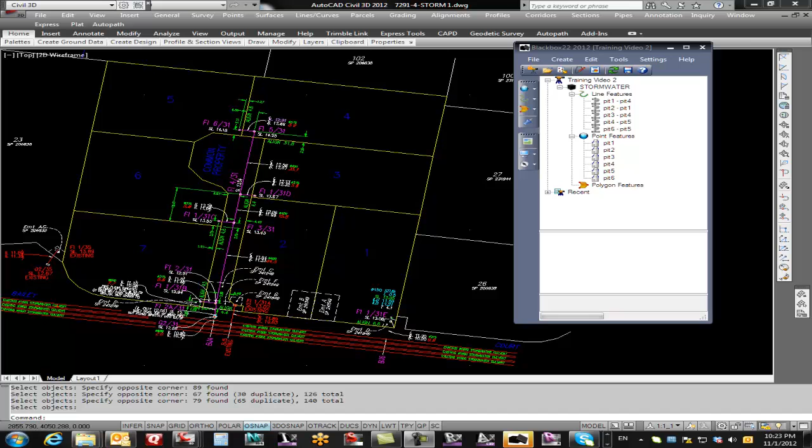In this video we're going to be capturing text data from the AutoCAD drawing and pass it back into our database. In the previous video I mapped in some layers and created the assets, but these assets came in with the name of pit 1, 2, 3, 4. But if I look in the drawing, they're actually 6/31, 5/31. The pipes don't have any grades on them, invert elevations, because it's a 2D drawing. Now if this was in 3D when I did the mapping, it would have actually mapped this information.

So what I want to do is capture the text data and have it populate. If I come in here, I can go into my capture settings. I'm talking about a stormwater here, and when I'm picking up a point feature, I want it to ask me for the asset name and the elevation or RL. Then when I'm picking up a line feature, I want it to ask me for the upstream first, then the downstream, and then the diameter.

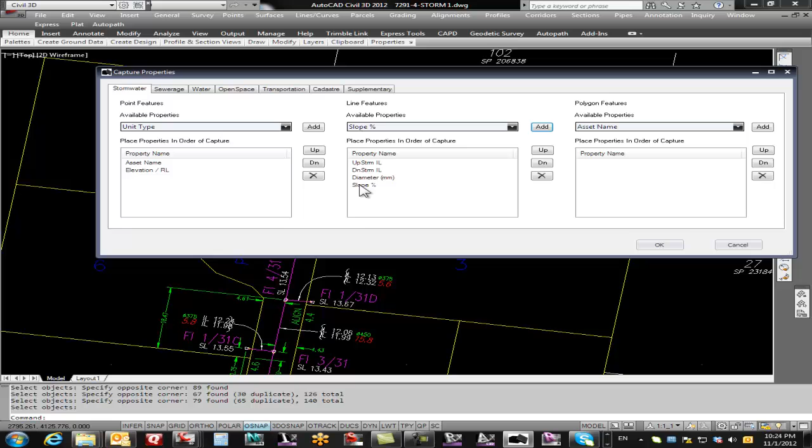A user can come in and pick any asset that they want, and we can add different properties to it. So if I wanted to select the slope, I could add the slope into that. Okay, I don't want the slope in this, so I'm going to go OK.

Now as we can see over here, it says pit 1, 2, 3. So what we're going to do is go into capture properties. I select capture properties, and it goes into the drawing and says select your entity. Okay, well this is my entity I'm selecting. So I pick that, and you can see a circle appears, so it knows that this is what you've selected.

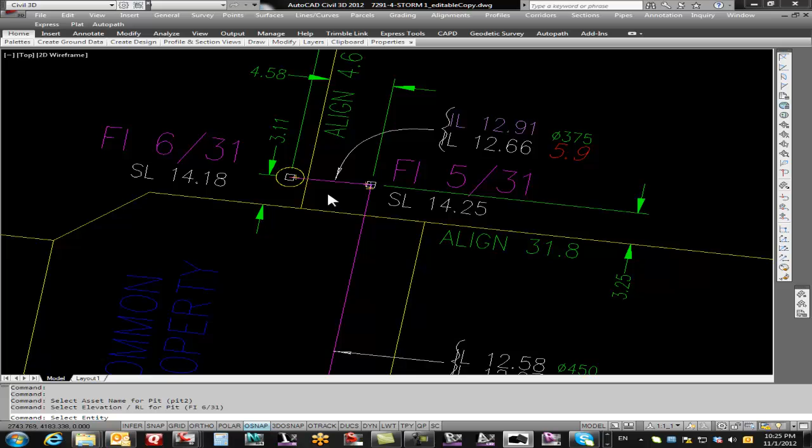Down below it asks me to select my asset name for the pit, so this is the name. Then it asks me for the RL or elevation, so that's the elevation. Then it comes up and says select your next entity, so I'll select this one, and I'll select this for the name, and this for the RL.

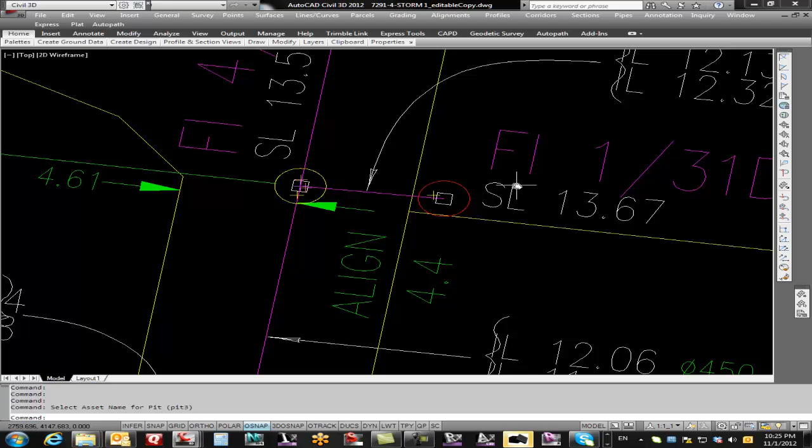I'm going to go ahead and do the structures first, so I'll select this one. There's my name and my RL. Let's go to this one, here's the name and the RL. We've got a couple more to do here. Let's do this one, and there's my name and my RL. And last one, here's my name and my RL.

Now we're going to look at pipes. So I'm going to select on the pipe. It knows that it's got a pipe. So now it says, what's your upstream? There's my upstream, there's my downstream, and there's the size, 375.

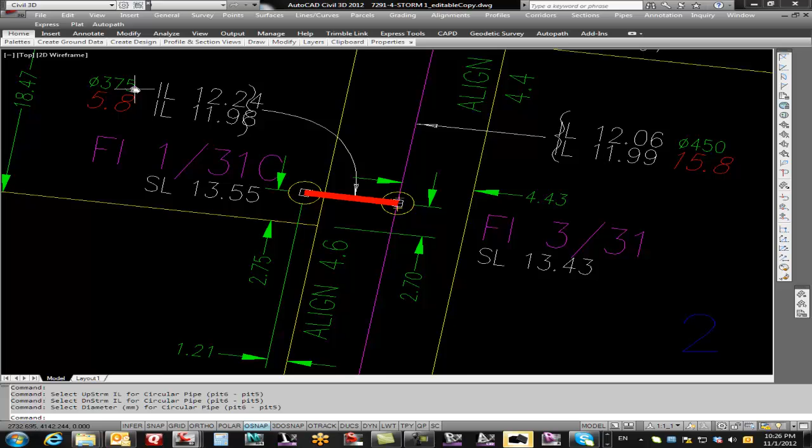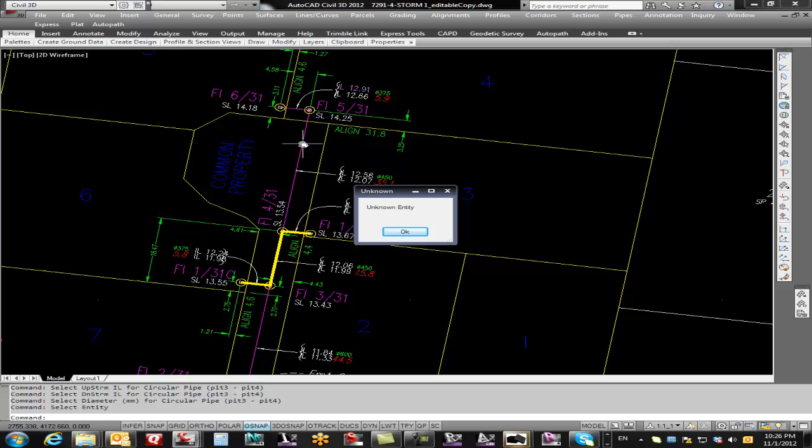Let's go to the next one. So there's my upstream, my downstream, and my size. Let's do this one, there's upstream, downstream, and size. And I'm going to try this one. Oh, it says unknown entity. Okay, so what's actually happening, I'm going to show you.

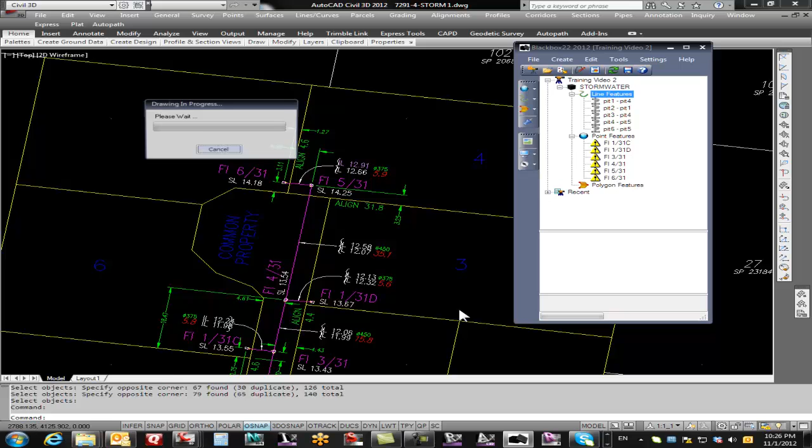What I'm going to do is draw these line features in here. So I need to get out of this command. I'm going to bring in the line features, and I'm going to say draw all these line features. I'm just going to select all, I'm not going to put any text on there. I'll say generate and exit, and I'm going to go OK.

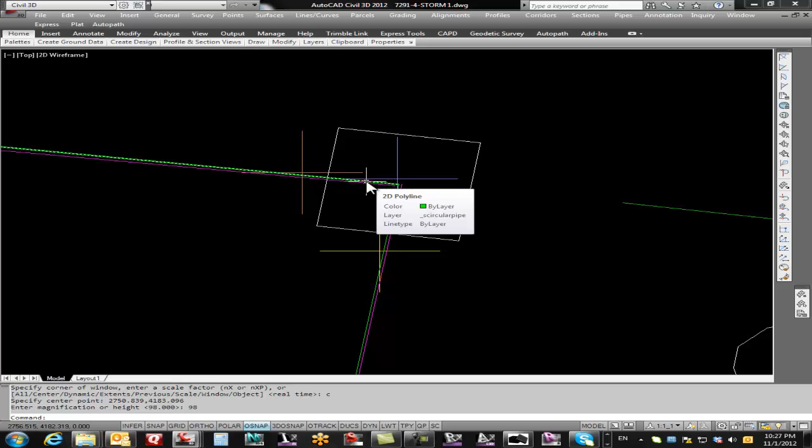Now if I zoom in here, you'll notice that the magenta lines are the lines that were in the drawing. When we're talking about the GIS, we need to have the connectivity. The lines need to go to the center of the structure, so when they're doing the GIS analysis on it, it can actually see that they've got a flow here. There's a tolerance in there, and we looked so far out around the center of the structure to look for the line. So when I was trying to pick on that line, it didn't recognize it because it knows it's actually in this location now.

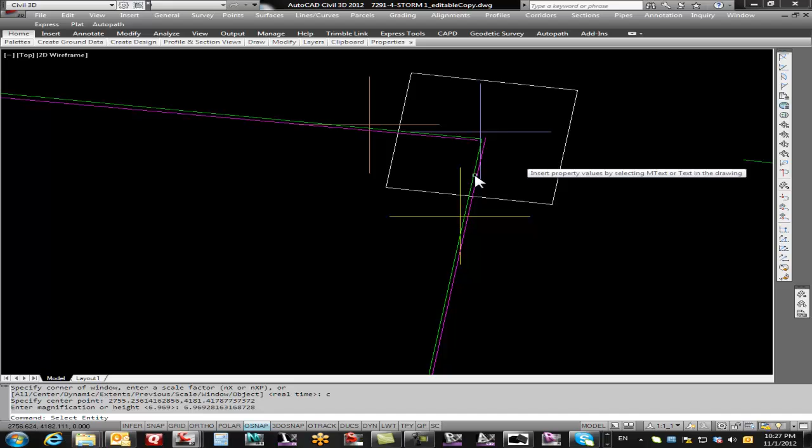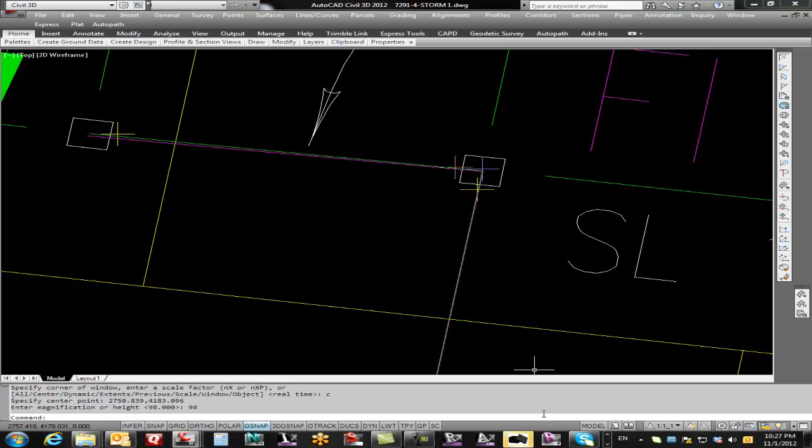So what I'll do here, I can finish this off. I'm going to come back in here and select this line here. There it knows it's bold now. I'll select that. There's my upstream, my downstream, my size. Let's just finish this off. We'll select this one, and say that's my upstream, my downstream, and my size. Press enter to finish the command off. I go back in, and now you can see I've got all the new names on here.

I've got some red icon or yellow icons here. So if I open this up, I can edit this asset, and we can see that it has some errors in this. So I can say, well, this is pit number 6. This didn't actually calculate a depth in here because it's the lid level and the invert level, so I could put in the depth there if I wanted to, something like that.

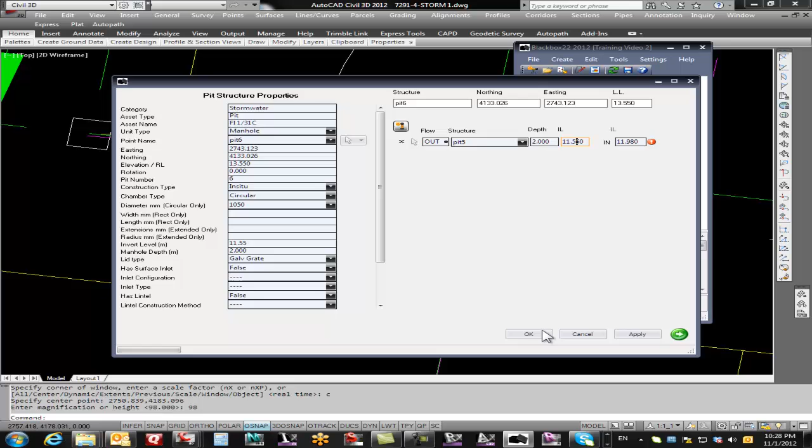Okay, and you can see that updates when I do that. There's my manhole depth. I'm just going to go okay just to show you. There it goes, bold. And the same thing with the pipes, I'm just going to go ahead and select these pipes. I can edit these, there they all are, everything I'm happy with. I can go okay, and I now need to just update these with the proper information. And that's it for this video.